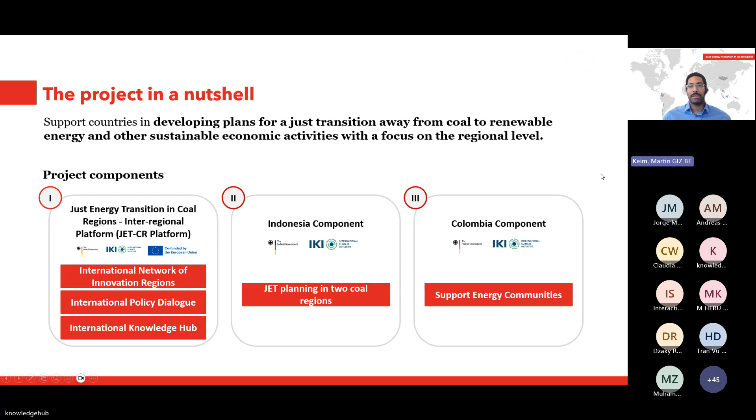Now let's dive right in. As I mentioned, we will start with the topic at a system level, so at the power system level, to be more precise. And we will start with an input from Dr. Jürgen Kern and Andreas Meurer. Jürgen Kern is a research associate at the German Aerospace Center, DLR, and he works in the Department of System Analysis and Technology Assessment.

Andreas Meurer is also a research associate and a PhD candidate at the German Aerospace Center, specializing on energy systems analysis, synthetic fuel production, and we have the pleasure to work with both in a study that we're currently conducting. So without further ado, I would like to hand over now to Jürgen and Andreas, who will look at today's topic from an energy systems level perspective.

Thank you very much, Martin. It's a pleasure and honor to present our competences and our contribution to this very important project on the level of system analysis. So DLR, one of Germany's largest research centers, with about 11,000 people, mainly focused on aviation and aerospace. We also have a system analysis team, which is actually about 100 people in the Institute of Energy Systems. And we are focusing on general analysis of energy systems. That means typically country systems, regional systems.

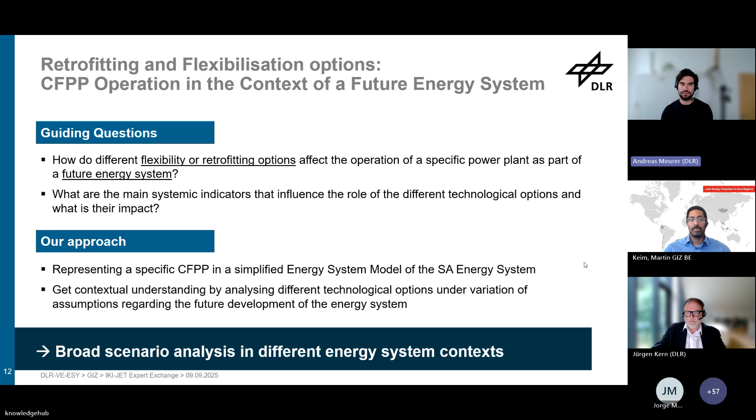We use some in-house tools that were developed already since, I think, 15, 20 years. It's called REMix, Renewable Energy Mix. This is a linear optimization modeling framework. That means it helps us to find usually cost optimal solutions to satisfy an hourly electricity demand over a year. So we have to do a lot of parameterization of the underlying model. And in the end, we can calculate cost optimal power plant setups depending on all the input assumptions that will provide enough electricity for today, but also for future scenario years.

So we usually calculate starting from a base year, which is usually the year 2020, because there we have some reliable input assumptions, but then we of course look into the future and calculate usually different scenario years in a 5 or 10 year step. In this study here, we will focus on the intermediate term, so we will calculate the base year 2020, but also future years 2030 and 2040. So this is our major tool we are using.

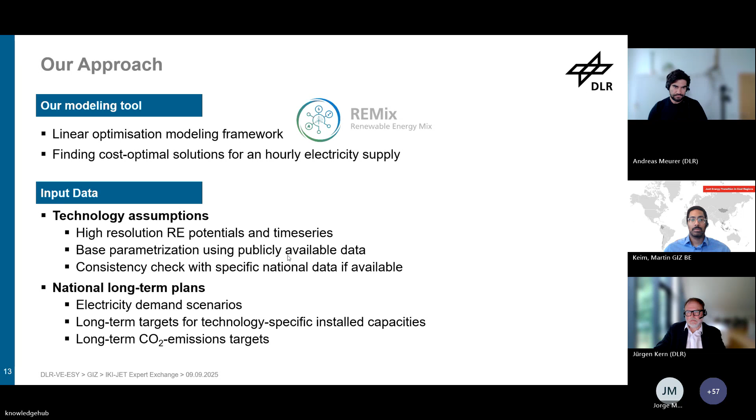And then we apply generic methods to retrieve this data and simplify it into a simplified electricity grid, because in energy system modeling, you always have to simplify data, because if you wouldn't do that, the computational effort would be too high, and our focus is on assessing multiple possible futures. So that's why we have to stay with a possible minimum regarding the details. We use those generic methods also for all the other relevant parameters, techno-economic assumptions, installed power plant capacities, and so on. Of course, we implement national characteristics afterwards, individually for every country we are assessing.

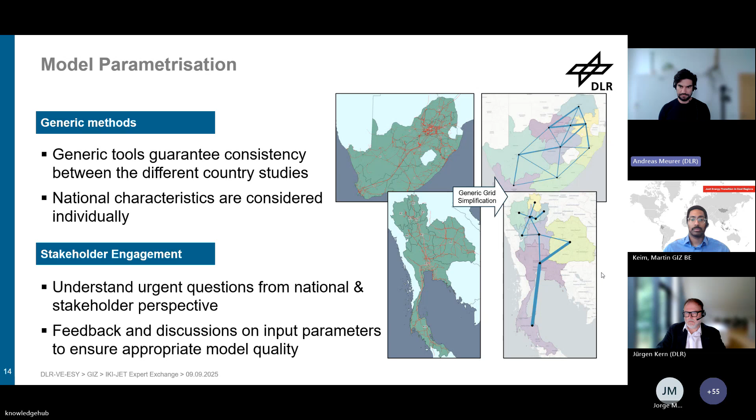Another scenario dimension could be the possible expansion for renewable capacity, or many more. So there are many scenario dimensions we can define. And by combining them all, we end up with a really large scenario space. That means the combination of all our input assumptions for every scenario dimension, if you multiply them all, you get a matrix of a couple of thousand combinations that we are all calculating for every country. So this is what is meant by broad scenario variation. Our focus is really, like Jürgen said, not providing a prediction, but covering a broad scenario space, so that in the end, the reality in the future will be somehow in this scenario space we covered.

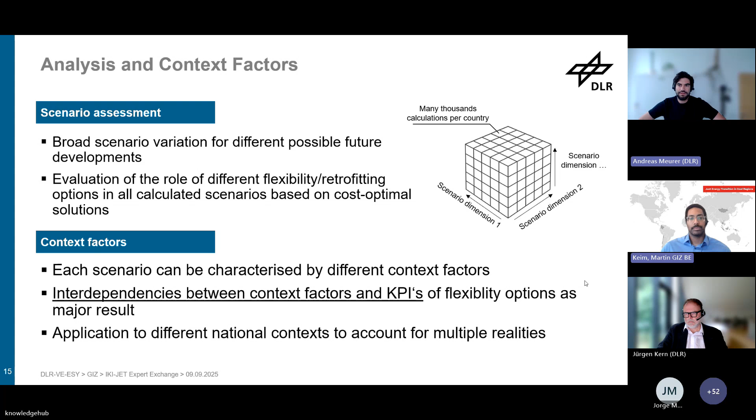So those context factors describe different realities, and then if we face a certain reality or certain scenario, we might know which of those flexibility or retrofitting options are more feasible or which are not in such a possible future. And of course, by applying the same method not only to one country but to 4 national country contexts, we try to account for even more possible realities. So yeah, I would end now, and I hope I made it a bit clearer what the systemic perspective aims at, and looking forward also to the next presentations.

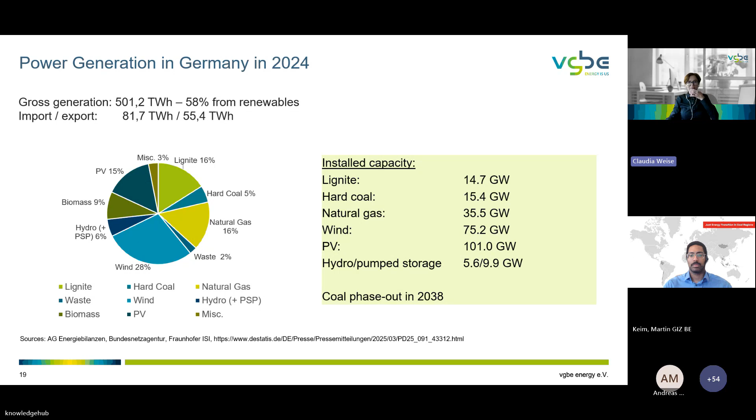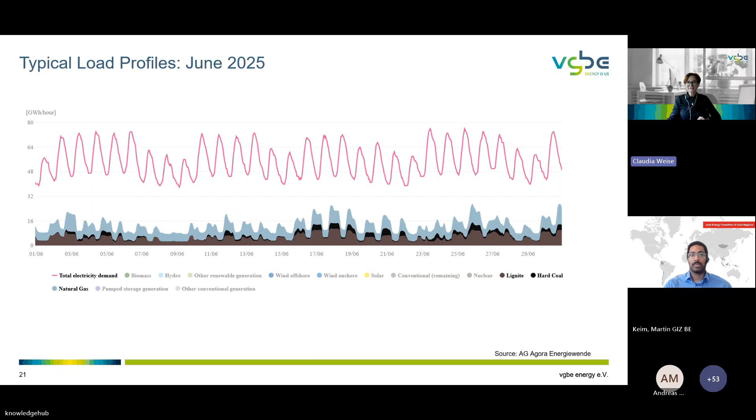And it's good to see that the conventional fleet has to be operated very flexibly in order to provide the according residual load. And especially the hard coal plants in Germany are flexing on a daily basis, and they are even operated in two-shifting mode, which means that they are shut down overnight or over the weekend because they are simply not needed. And this brings me to the next topic of my presentation. I would like to share with you some learnings with regards to the flexibilization of coal-fired power plants. Next slide, please.

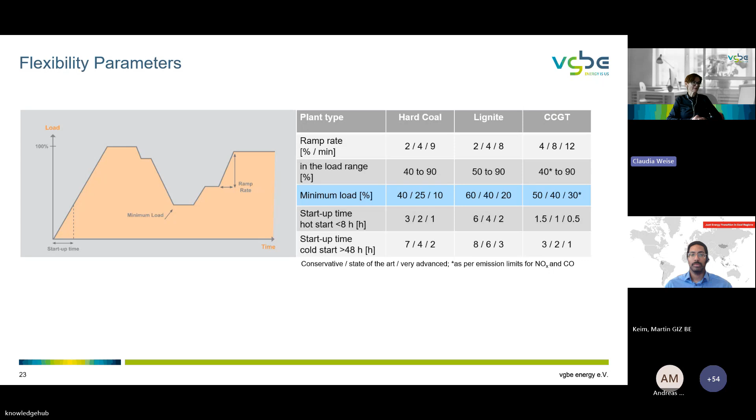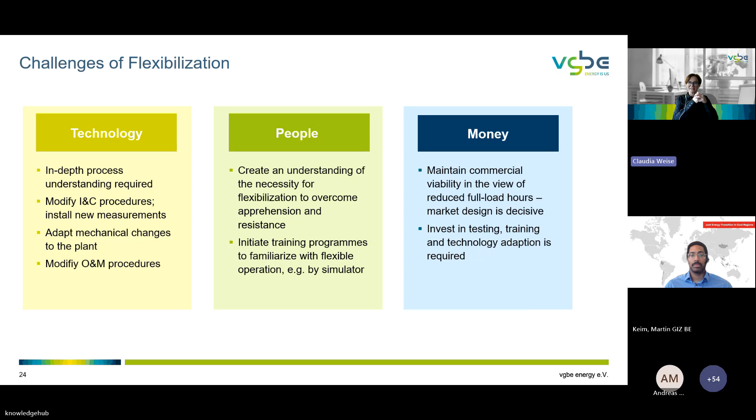And we have conducted some pilot projects in various countries, in India, South Africa, and Turkey, under the auspices of the bilateral energy partnerships of the German government. Next slide, please.

And the key focus of these projects was to do the first step in the flexibilization. And the first step is that you take a certain reference plant and do an assessment of the conditions of the plant. You assess the operating data of the past and conduct test runs in which you operate the plant at different loads and play a little bit around, so to say. Would you please go back to the previous slide? Thank you. To identify factors for low load operation and higher ramp rates.

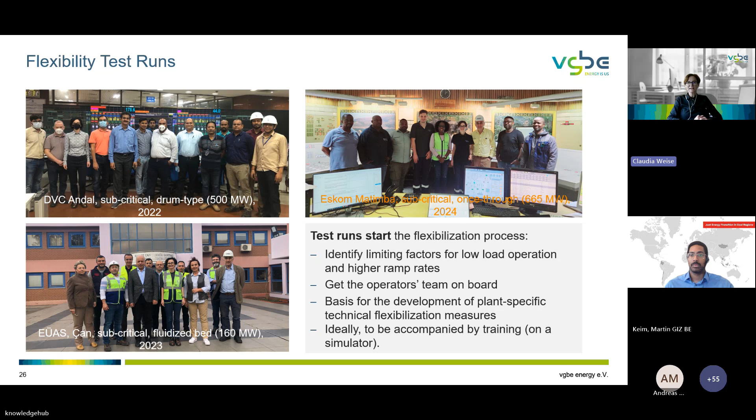And it's also very good that you get the operators team on board, because they learn along the way and they get familiarized, and it's a very good starting point really to decrease the resistance regarding this whole topic, also from this people perspective. And moreover, the assessment of such test runs is really the basis to develop plant-specific technical flexibilization measures, and to make a plan what needs to be done in order to make this plant more flexible. Next slide, please.

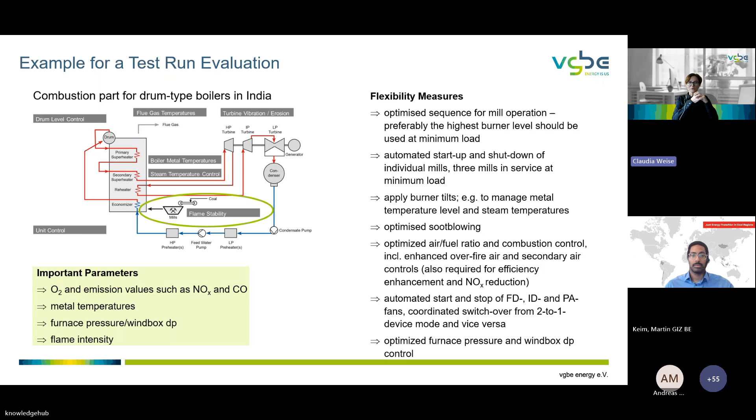But we see in Germany that we have a very high level of automation, which really supports this type of operation. Training programs, of course, are really important, which also should be thought of in the first place. And then, of course, these measures need to be implemented, and this will require a whole set of new operational schemes, including new inspection methods and life cycle monitoring procedures. Maybe it's also needed to have new staffing concepts if you come to the point that you have two-shifting or whatever. And then finally, it becomes a routine.

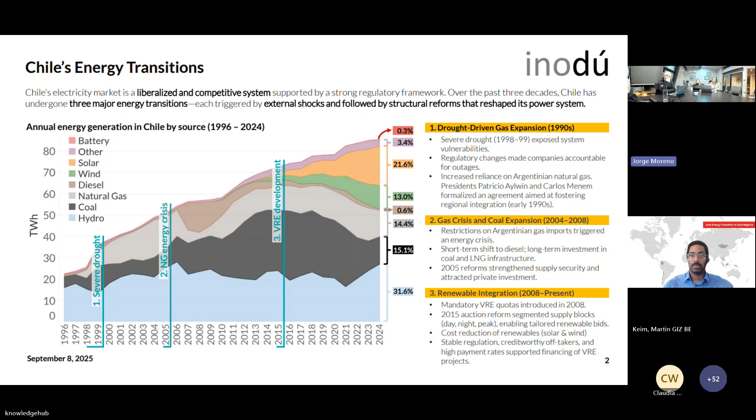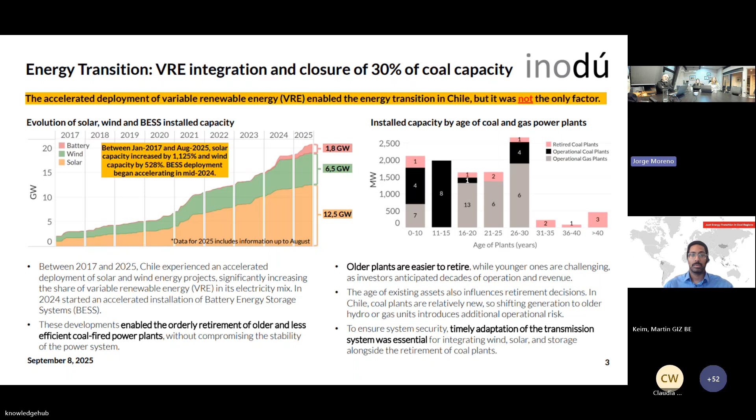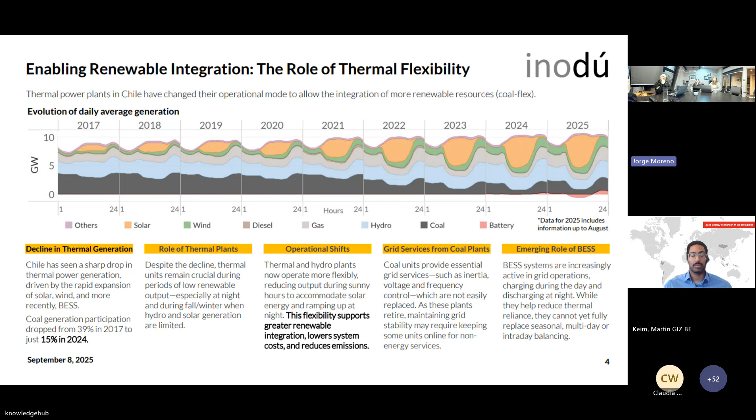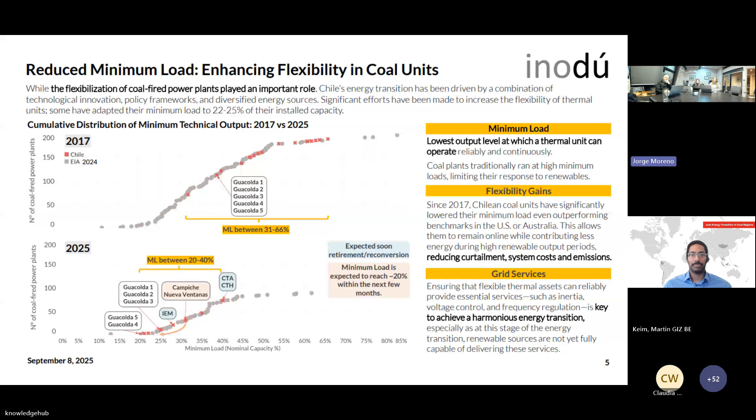And 2 units, which are maybe the more orange colors, are currently working to reduce their minimum load from 30, maybe 31, to around 20 and 25%. So units in Chile are actually outperforming a lot of units in the US and actually some units in Australia as well. And Jorge will now tell you how we managed to do that. Yeah, so next slide.

So first, important to emphasize that the Chilean power system is an isolated system. So all the flexibility must be provided by units within the system. So in this case, we assess the impact of further reducing the minimum load of coal and gas units on the system operation by year 2027, in 3 different scenarios: business as usual, intermediate, and aggressive.

The scenarios consider different minimum load levels. The business as usual is kind of the average minimum load that we can find today in the system. Intermediate level is a reduction to 24%, and the aggressive is a reduction to 17%. For coal units, those levels imply the operation with 1 mill. And with gas units, the aggressive scenario implies a regulatory change in limits for NOx emissions.

To do that assessment, we use Plexos to model our power system. We have a complete representation of the power system with transmission constraints, security constraints, different scenarios for hourly variation of renewables, and so on. The model is on an hourly basis to have a complete and detailed assessment of the power system.

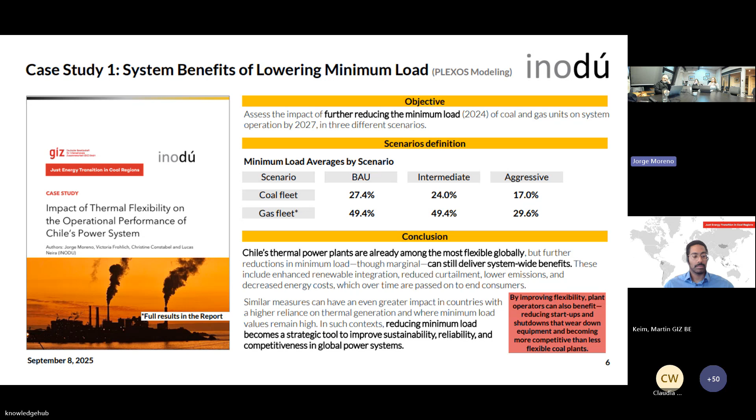Chile's thermal power plants already are, as Victoria mentioned, among the most flexible globally, but a further reduction of minimum load, though marginal, can still deliver some value in different system-wide metrics.

So in the next slide, we show the benefits that we estimated under the aggressive scenario, and you can see that we have improvement, in this case, reduction of thermal generation and out of merit dispatch. This is very important for the cost of operation of the system. Also, we reduce curtailment. We assess also a reduction of system cost and the marginal cost as well, emissions and pollutants. So, next slide.

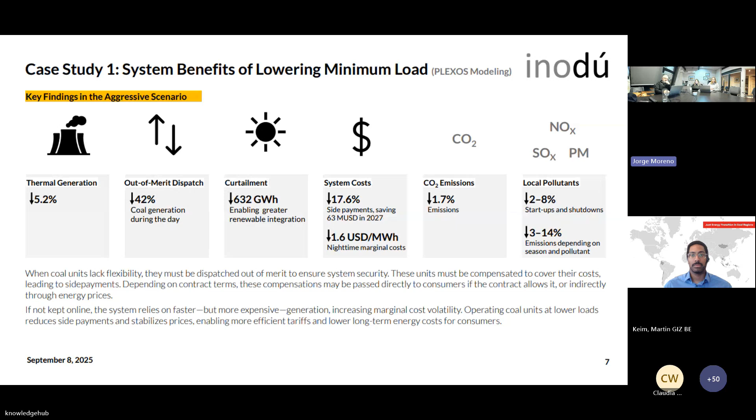So as we assessed the impact at the system level, now we will show a case that presents how we have implemented those measures at a plant level. In this case, we present a practical application just to show how to achieve what we are suggesting. So we started this process in 2022, where our team supported Guacolda with the application of the EPRI high-level flexibility assessment to review 10 areas related to the flexible operation of their units.

And just to give a brief context, Guacolda is located in the north of Chile. They have 5 coal-fired units. Each of them is approximately 150 megawatts. The benefits of improving the flexibility of the units were evaluated by modeling the dispatch of the power system under different scenarios, the same thing that we showed before. For that process, we also used Plexos with a complete representation of the power system. In this case, we will skip that part.

Finally, minimum load reduction trials were conducted to improve the flexibility of the units. Coal-fired power plants typically operate with 2 or more mills. A single mill operation is not a standard practice. However, with the growing integration of renewables in Chile, operators have recognized the need to apply process innovation in a reliable and controlled manner. In order to do that, as other speakers have mentioned, we did a systemic approach to act on people, processes, and technology in order to align flexible operation objectives with maintenance practices and to mitigate failure modes. So the next slide.

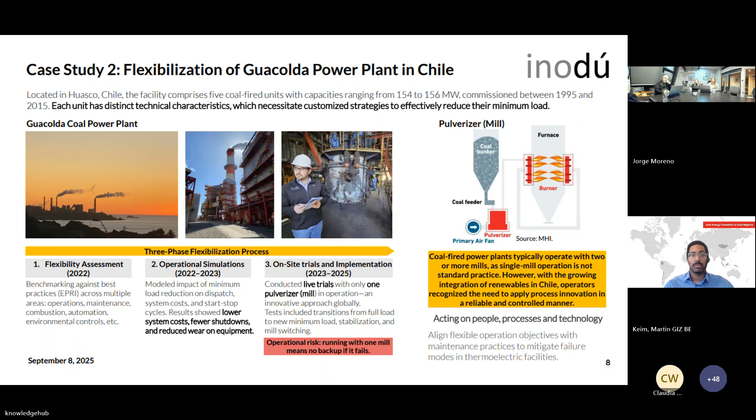So the team evaluated the flexibility of the units across 10 different dimensions. As I mentioned, we used the EPRI tool to assess the impact of flexibility in equipment operation mode, pressure part management, operations, maintenance, combustion and performance, instrumentation, control and automation, environmental control, cycle chemistry, turbine and generators, and balance of plant.

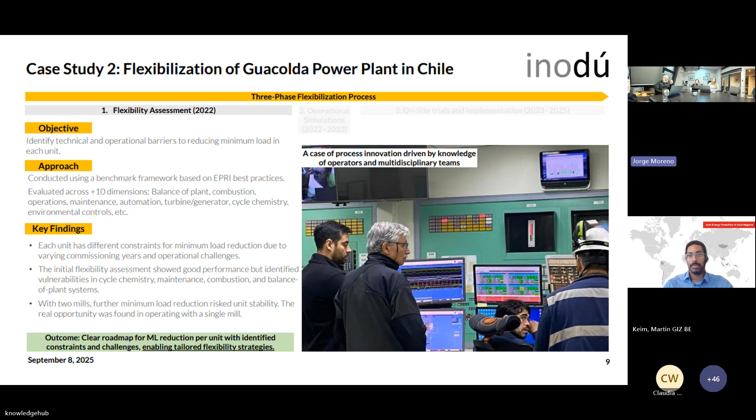The initial flexibility assessment showed good performance, but identified some vulnerabilities. With that, the team defined a clear roadmap with minimum load reduction of Guacolda's units. So next slide. Then in another stage, next slide. No, previous one, this one. Okay, so then in this one.

In another stage, the team validated the reliable and stable operation at the new minimum load target through testing. Here it's important to emphasize that we conducted tests with only 1 mill operation. Something that is very important is to plan for the switch from 2 mills to 1 mill operation at minimum load and build confidence in the operators in that process.

The team assessed operational risk, for example, in the operation of the feed water system, temperatures, SCR, and other subsystems of the power plant. We observed a more stable operation, actually, and an improved combustion performance compared to 2 mill operation at the low load. Next slide.

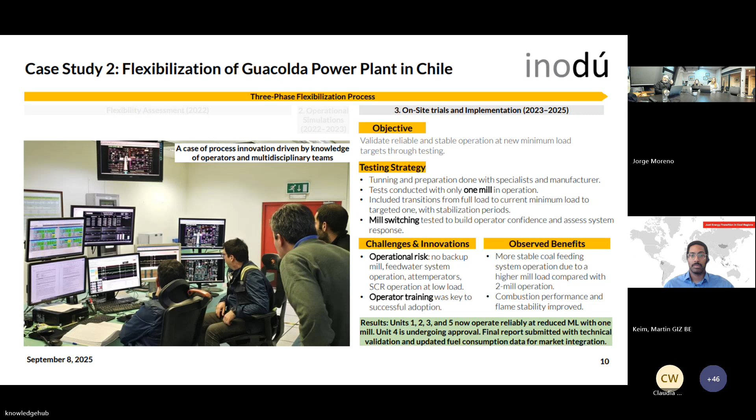So finally, in conclusion, the energy transition process requires a reliable operation of thermoelectric facilities that remain in operation. This is something that is applicable in every country. And the reliable flexibilization of thermoelectric facilities is driven by operators supported by strong leadership commitment at the plant level and requires a systemic approach.

So the flexibilization of thermoelectric facilities should be viewed not as a replacement for long-term coal phase-out, but as a best practice to support a smooth transition. It enables thermal units to operate at lower loads while remaining online and ready to support the variation of renewable resources. So it provides additional time also for the system to adapt in a more coordinated manner.

Flexibilization also is a very cost-effective and impactful measure that leverages the capabilities of existing operational assets. Chile's experience shows that the technical barriers to flexibility can be overcome with targeted assessment, operator engagement, and practical testing.

And I think that is very impressive because in our country, of the 12 coal-fired facilities that will remain operational by the end of next year, 9 have a minimum load below 25%. I would say that this is state of the art, and 2 are currently in the process of reaching that target.

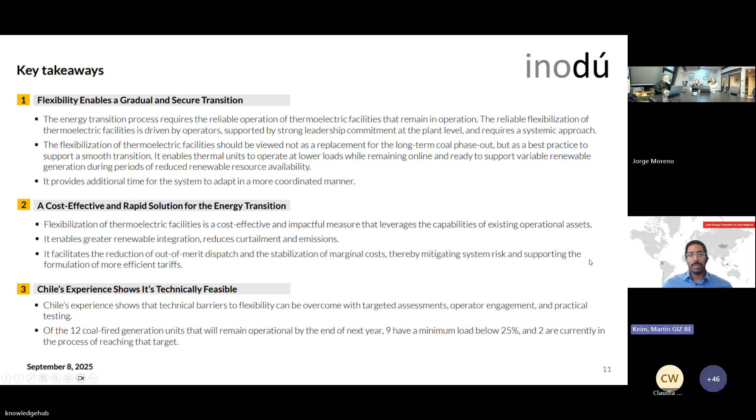Thank you. Great. Thank you very much, Victoria and Jorge. That was very interesting on the case of Chile.